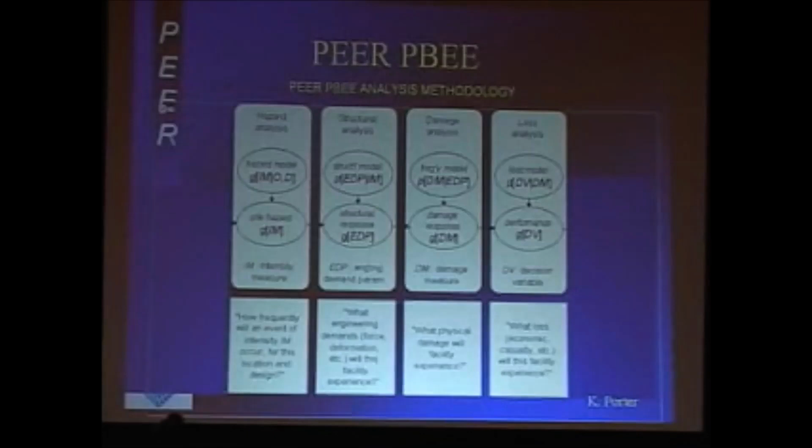This framework is made up of several pieces. Four basic sets of variables. At the beginning is something we call an intensity measure. It's useful to think of that as peak ground acceleration or spectral acceleration. But it's a measure of the intensity of shaking. And that's characterized by some function that's the annual likelihood of exceeding that intensity.

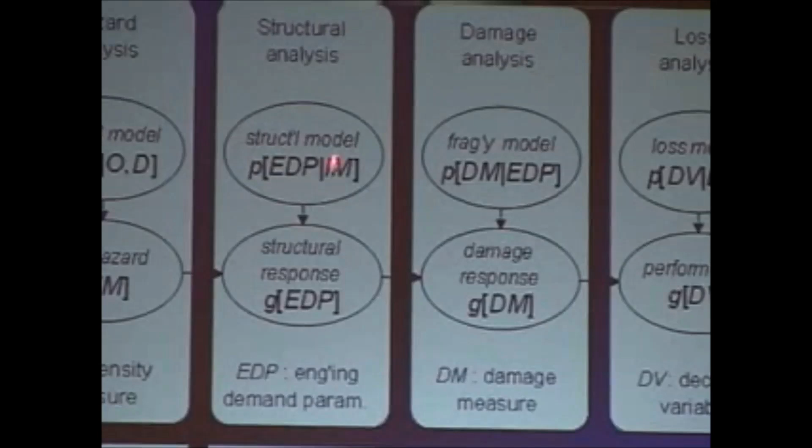A second set of variables that we call engineering demand parameters. Traditionally, those might be something like the maximum interstory drift in a frame. From a probabilistic point of view, we're interested in characterizing the conditional probability of seeing some level of, say, drift in the structure, given the intensity of the earthquake. And we can put those together, as you know, to get the annual likelihood of displacement, for example.

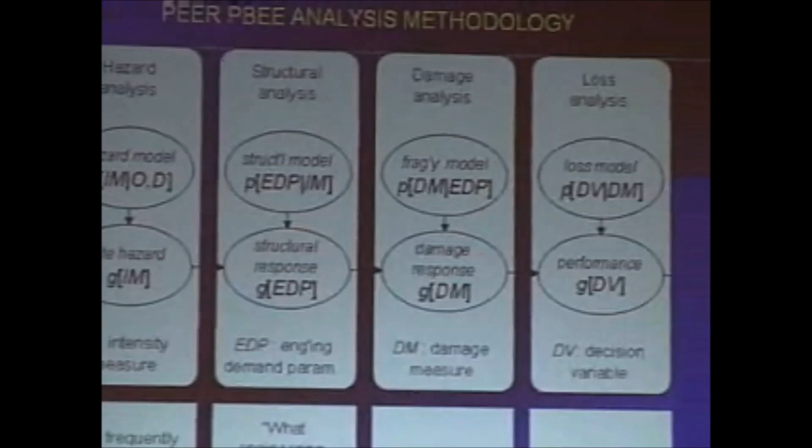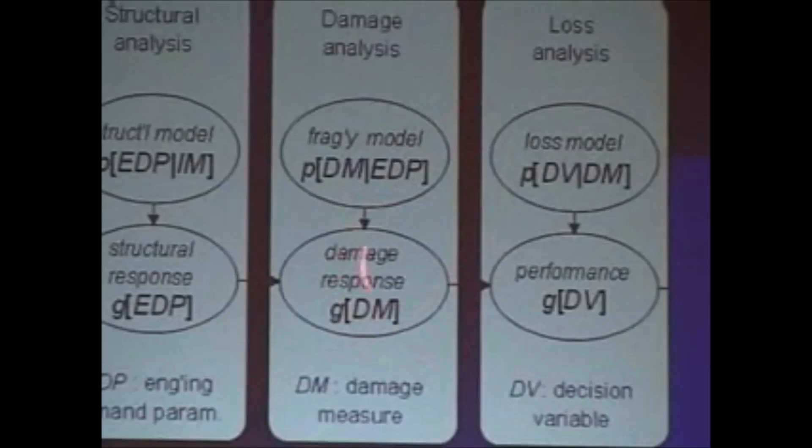In the other parts of the program, people are also interested in trying to predict damage to the facility given the displacements. So that might be the degree of cracking in a partition. And from the degrees of damage, the next step is to try to predict what we call decision variables. And that might be the repair cost for those particular partitions, for example, given their damage state.

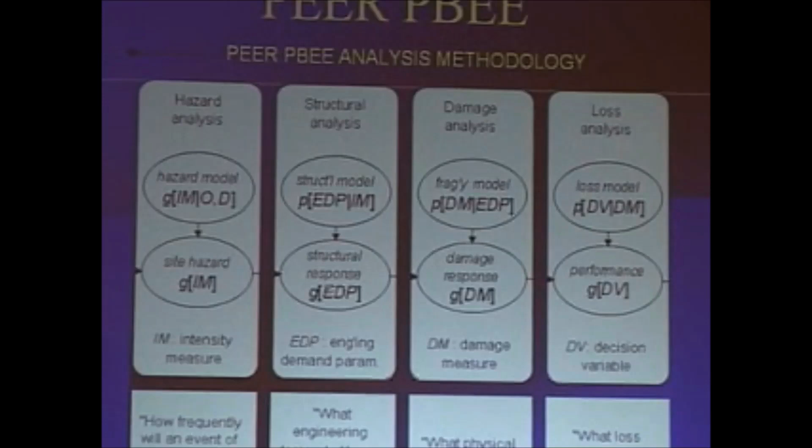So these several elements of the structure of the analysis problem associated with performance-based design are put together in a triple integral, which is called the framework equation. And as probabilists, you'll recognize this as something like this mean annual frequency of exceeding a particular ground motion level, a conditional distribution of displacement given ground motion, a conditional distribution of damage given displacement, and a conditional distribution of, for example, dollars given damage.

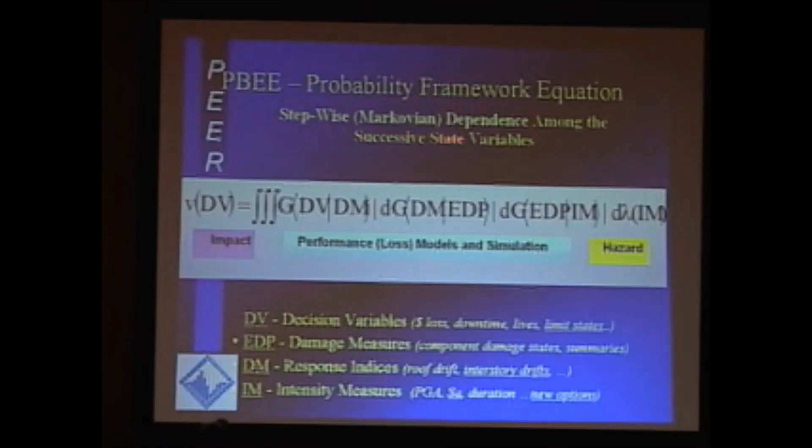So ultimately, we're interested in these so-called decision variables, which might be dollar loss, lives, limit state exceedances or not. So for example, this might be something like the mean rate of collapse events. One element of this formulation from a probabilistic point of view is that we use a Markovian type of dependence. For example, this is a conditional distribution of displacement given intensity measure. This is damage given displacement. You notice it's no longer conditional upon intensity measure.

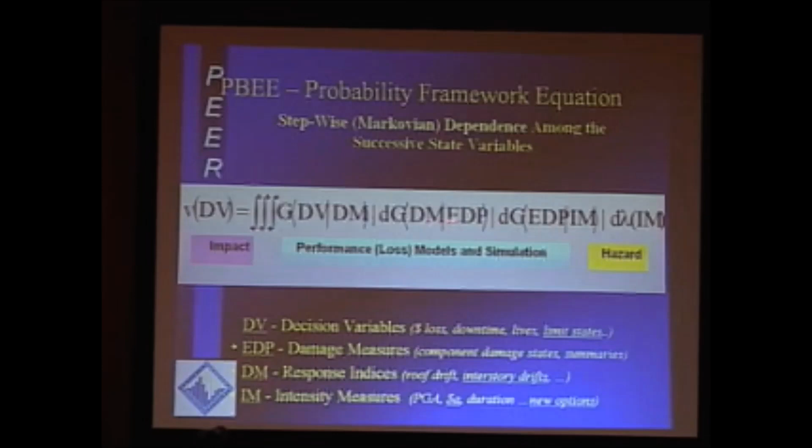So a simplifying assumption of this Markovian type dependence is used so that the focus of the individual groups in the projects can be to look at damage given displacements without having to worry about what was the intensity or nature of the ground motion which caused it. Or people worried about economic impacts of a given level of damage don't need to worry about structural displacements or intensity measures in the background. And that's a simplifying assumption that helps us enormously.

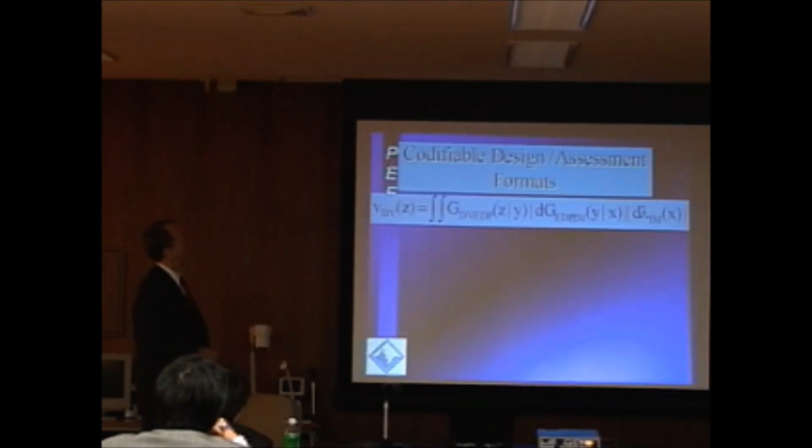One of the objectives of using this formulation is to develop probabilistic-based codes. Codes that look to the engineer user something like a load and resistance factor formulation. And that goes through a couple of steps. I'll just characterize briefly. This is a reduced integral version of the same equation, intensity to engineering demand to a decision variable. The decision variable we'd like to have a mean annual rate of would be a limit state such as collapse, no collapse. So the value z equals 1 might be the collapse condition. The value z equals 0, non-collapse.

We can simplify this to represent this in variables that are maybe more familiar to us. If we use as an intensity variable, say the spectral acceleration, the intensity of the ground motion shaking as characterized by the spectral acceleration, most frequently we would use spectral acceleration at the first mode natural period of that structure as being the spectral acceleration that best characterizes the frequency content driving the major dynamic response of

the structure. This EDP to IM relationship might more specifically be, as I suggested, say the maximum interstory drift, peak drift during time, maximized over all of the stories to get a reflection of the degree of damage in the structure, and its proximity to a collapse condition. So we need to know a conditional distribution of displacements given the strength of the ground motion. We'll get that from nonlinear time history dynamic analysis, or in more approximate schemes by, for example, static methods.

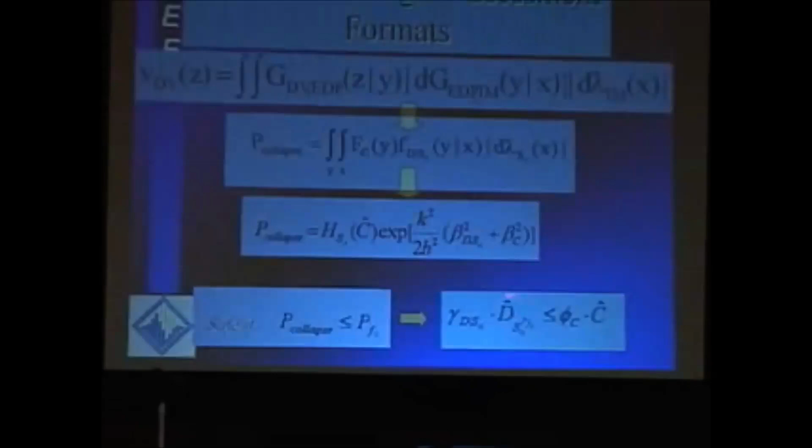But the more interesting form to get this into more viable application terms is to put this into something like a load and resistance factor format. That is, where the engineer compares a capacity, a median capacity in displacement terms, multiplied by some kind of reduction factor, like 0.9, like a phi factor. He compares it with the demand, where the demand would be a median displacement demand under a ground motion, as measured by spectral acceleration, associated with the target failure probability.

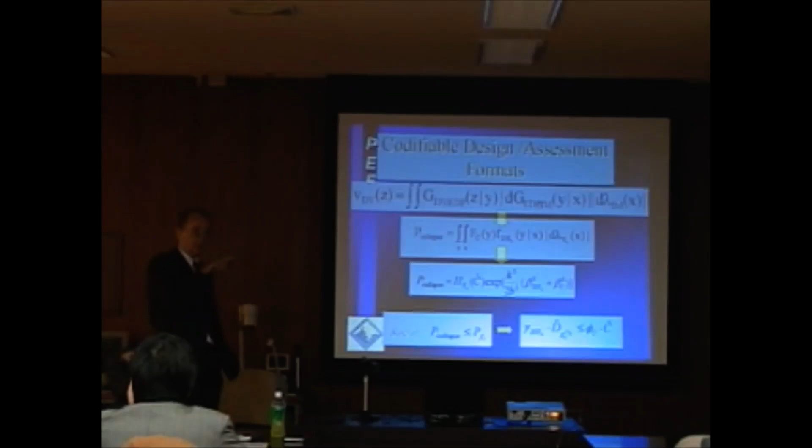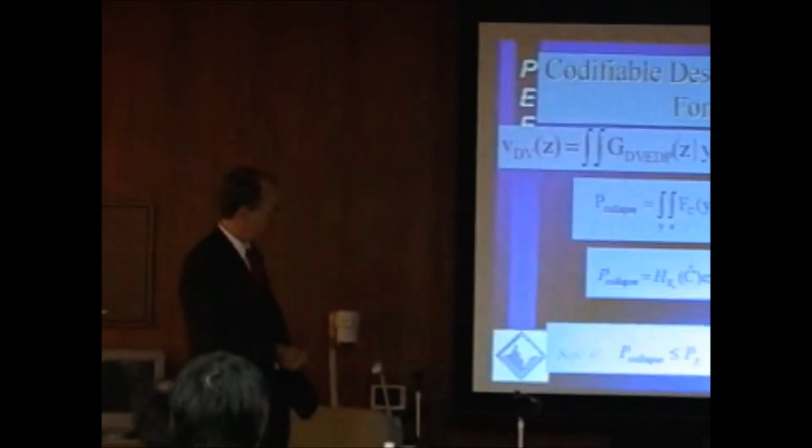So, for example, in the steel guidelines called FEMA 350 for steel moment frames, this target failure probability is set at 2% in 50 years, approximately 1 in 2,500, or 0.0004 per annum. And so we can see how that will work in just a moment. One looks at the probability, gets a corresponding ground motion level, estimates the corresponding median displacement, and then multiplies it by a gamma factor, some additional factor to reflect other

components of uncertainty. So, for example, this phi factor turns out to be an exponential form involving this dispersion, the degree of variability as measured by the standard deviation of log capacity squared. A coefficient k, which has a sense of slope on the ground motion hazard curve, and b, which we'll see a bit later, is a measure of the dependence of displacement upon ground motion intensity.

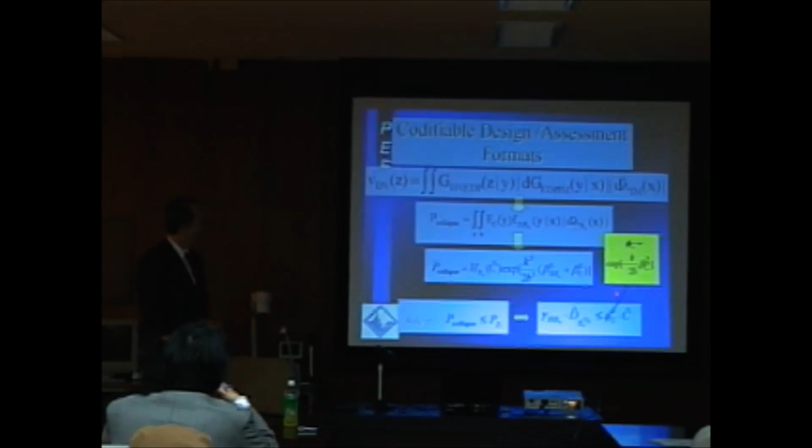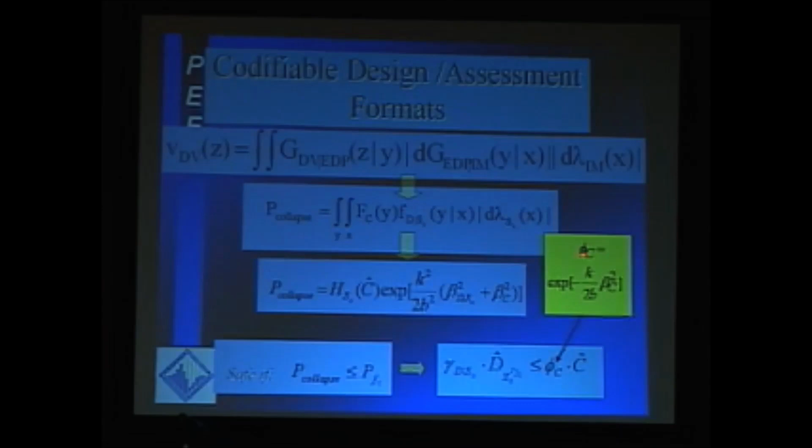The important thing to recognize here is that with some steps and some analytical assumptions, we've reduced this target limit state probability exercise to a load and resistance factor form, which makes it more familiar and more acceptable for application in practice and in codes and guidelines. But we have explicit analytical forms, so that if we make analytical studies to understand the degree of variability in capacity and in demands, we have a location in which to insert those variabilities, and we immediately get the dependence that our load and resistance factors have upon that variability.

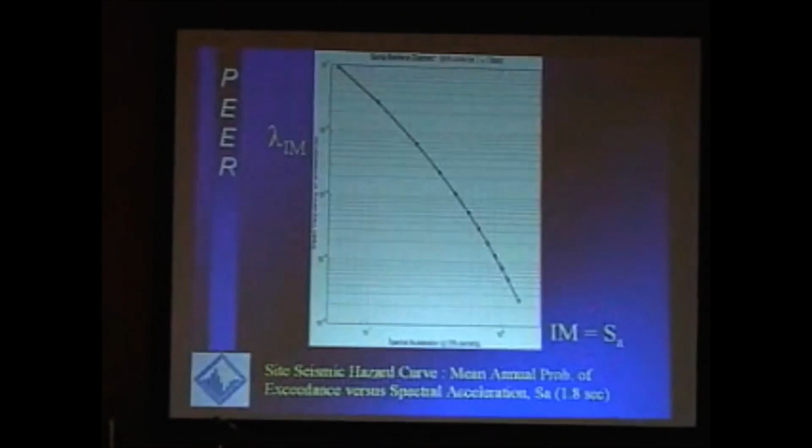So the elements of this problem then become a hazard curve. This is a result of probabilistic seismic hazard analysis. This is an annual probability of exceedance as a function of a ground motion intensity measure, here, as suggested, spectral acceleration at first mode natural period. Later in the talk, we'll talk about some alternatives for this that may work a little better.

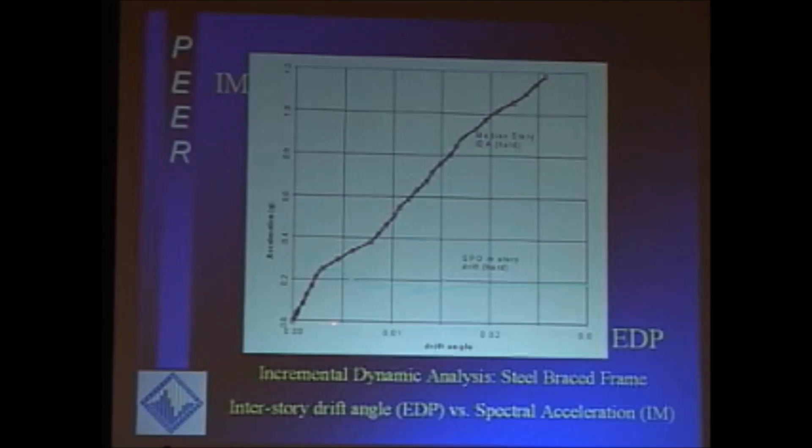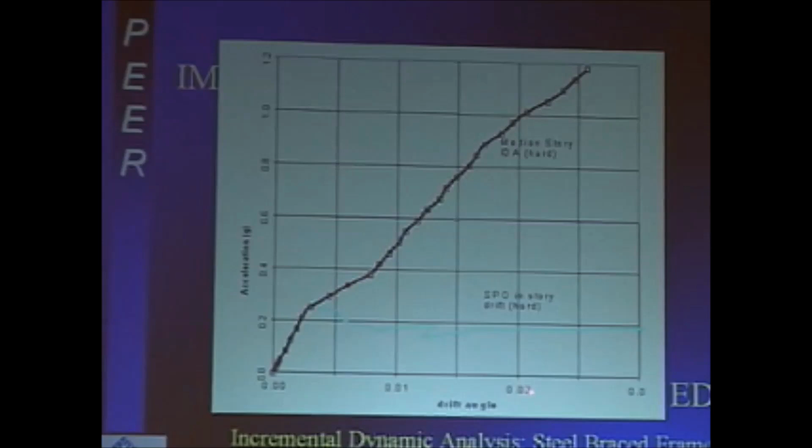What we show here is an example of what's called an incremental dynamic analysis. That is, a particular ground motion record was taken and scaled to multiple different levels. And for each level, a nonlinear dynamic analysis was run, and the maximum roof drift, or story drift in this case, was plotted. So this is a result of some 20 or 25 nonlinear dynamic analyses that shows how the drift increases as the ground motion intensity increases.

In blue, which you probably can't see, I apologize, is a conventional static pushover corresponding to this braced frame. You see it goes up, there's a yield plateau, this falls when braces buckle, and levels off at a plateau of 70 or 80%. One of the interesting things that comes out of these kinds of studies is, one, this sort of represents a dynamic version of this static pushover, but we're interested in how this increases, obviously linearly in the early phases when the structure is linear.

It tends to go to a softer slope when the structure is in the decaying strength condition. And then as this becomes a plateau, it's basically an elastoplastic system by this time, we did get sort of a straight line, something like a reduced stiffness, equal displacement rule taking place.

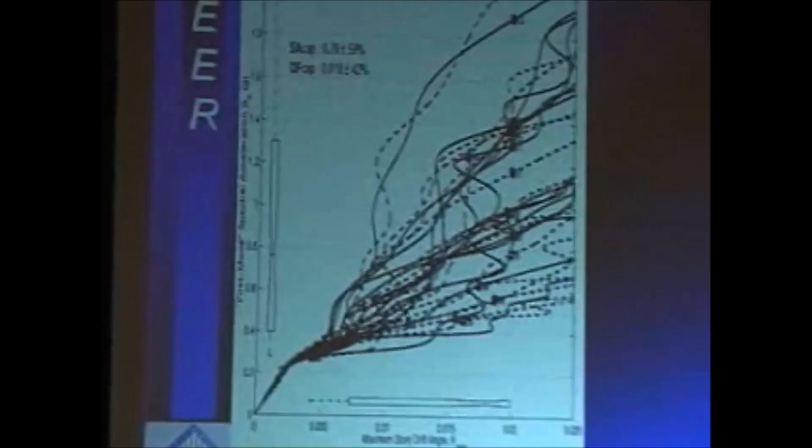This is a result of doing the same thing for that structure with multiple, some 30 ground motions. And one of the immediate things that comes out of this observation is the need for statistics. So if your structural engineering friends say we don't need probability and statistics in doing structural analysis for earthquakes, if you show them a plot like this, you can ask them, how are you going to deal with the problem that shows this degree of variability from one record to the next?

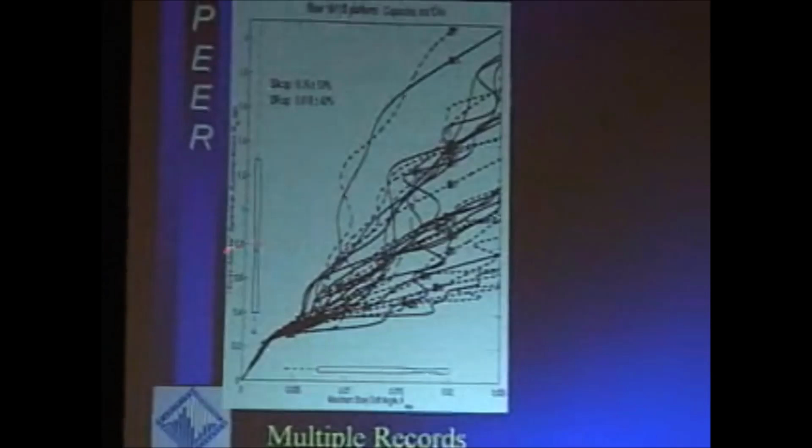And so what we have here is, again, the level of ground motion as measured by the spectral acceleration in first mode versus maximum story drift. So at any given level, you have degrees of displacement response that vary by a factor of 10 to 20, depending on which record was used. This is, again, why questions of record selection are non-trivial and important to our problem.

The nature of these curves, which we call IDAs, or incremental dynamic analyses, is also, I think, interesting. Among other things, we see them all go up, obviously following a fairly constant pattern when we're in the linear range. Also, the softer slope as the structure begins to go into a force degradation range, followed by different levels of severity of the record in terms of how rapidly the displacement increases as the ground motion increases.

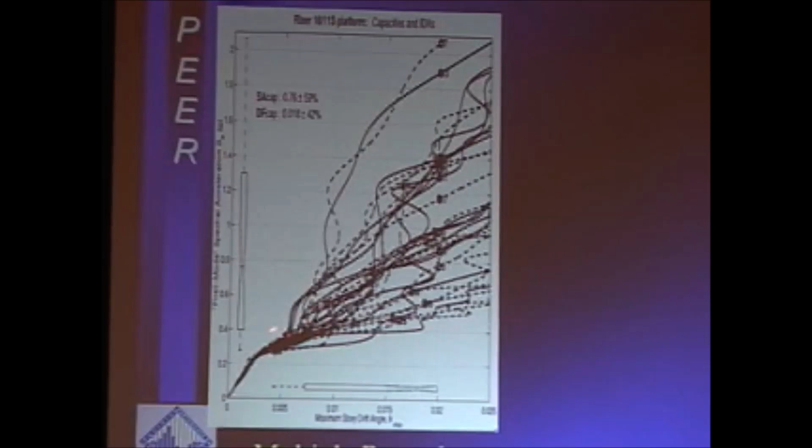We have those that are very flat, which implies a very severe record. Small changes in ground motion lead to very large changes in displacement. And some records which are quite benign. That is, if you follow this line up, you can see that even at spectral accelerations that are 5, 6, 8 times the yield spectral acceleration, the displacement versus input is effectively in the same straight line as one would have if the structure had remained linear. But mostly we see, of course, large increases in displacement.

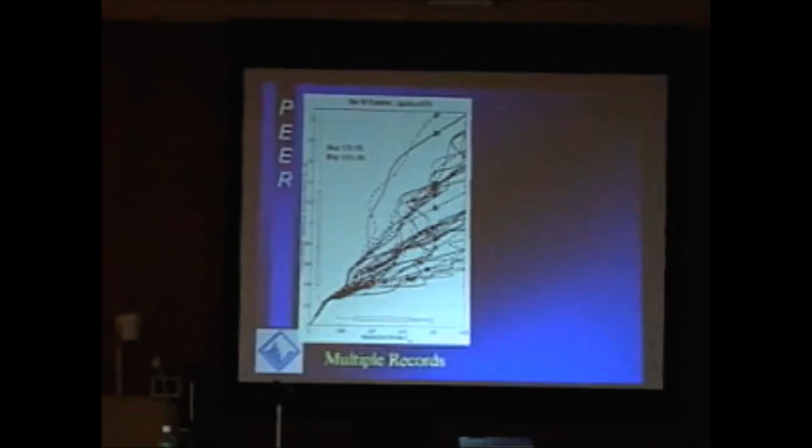And this has led to a definition of a global instability by looking at the slope of this curve. When this curve becomes virtually flat, it implies, just as with a static instability definition, a small increase in load leads to a very large increase in displacement, something like a definition of instability. But here it's a dynamic measure of the load, the dynamic responses we're looking at. Recall each of these lines is the result of 10 or 20 or 30 nonlinear dynamic analyses, something we can afford to do in the university, if not in practice.

The other characteristics of these, so in any case, we look at capacity measures often, as was done in the FEMA 350 or SAC project for steel frames, by looking at the comparative slope here versus the initial slope here. And in fact, using a rule such as 20%, that is, if this slope has become only 20% of the initial slope, defining that as an effective instability.

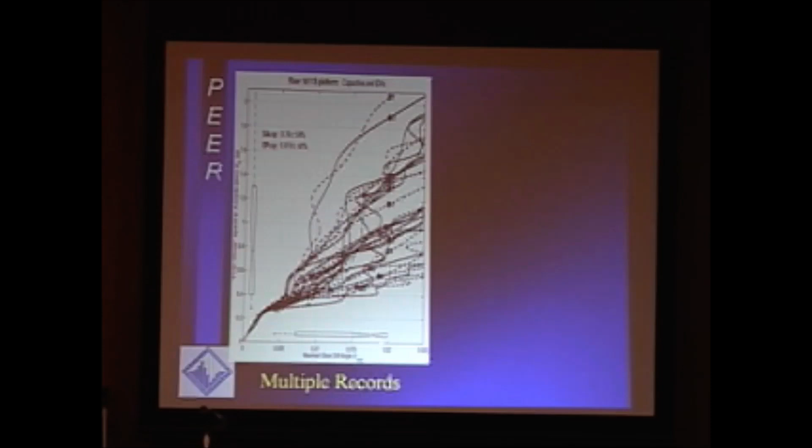And where that curve happens, these dots on here, where that 20% rule is reached, is an indication of a capacity point. That is where instability, in effect, has happened. So we can measure the displacement capacity by looking at these data points. And this is a measure of the median and the sigma and the dispersion.

Another observation to be made about these curves is they're not necessarily monotonic. That is, you can have cases where as you increase the ground motion, the displacements decrease. I'm sure you've seen that yourselves if you've run nonlinear analysis.

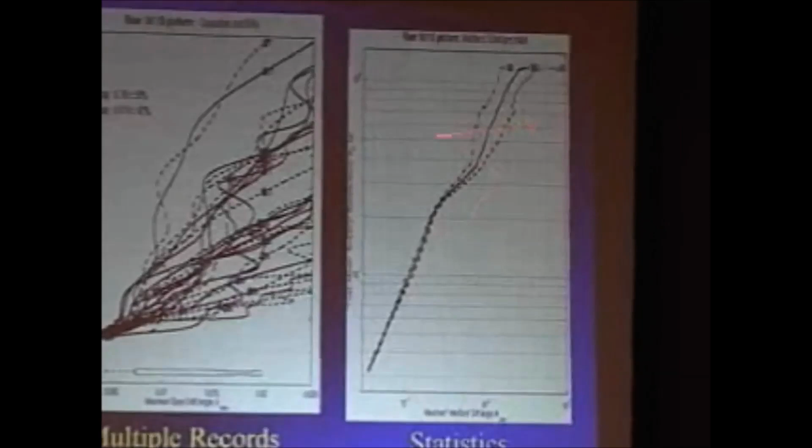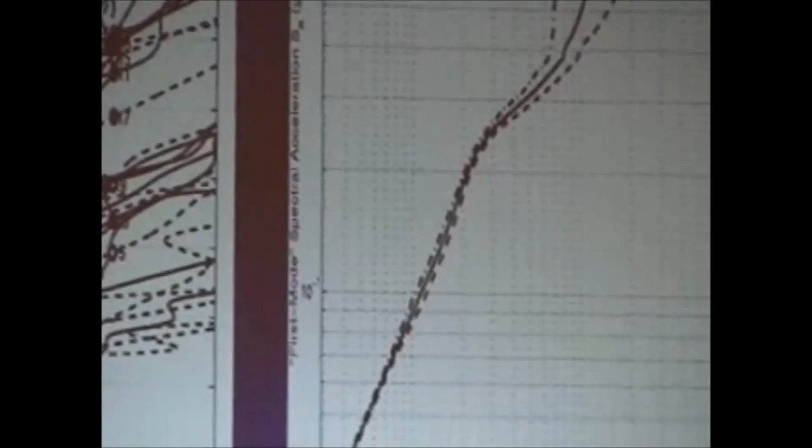So we need statistics. This on log plot is a plot of the median and the plus minus 40 percentile. I think perhaps it's a 90 and a 10 percentile value of the displacement corresponding to a particular ground motion level. And this is the dispersion we're seeing across this level. So from a curve like this, we get a median displacement given the ground motion intensity and the information needed to develop a probability distribution for the displacement given ground motion.

So these are the elements of the problem as we see them. This is a drift axis, this is a probability axis, this is a ground motion intensity axis, say spectral acceleration. So we have denoted here this so-called hazard curve, or ground motion hazard curve, which gives us the probability of exceeding a given level of ground motion. So as I suggested, those criteria in the load and resistance factor format would suggest that you enter this curve with a target failure probability, say 1 in 1,000, 1 in 10,000.

Go up until you get the corresponding spectral acceleration, which we call spectral acceleration associated with level P0 probability. Move across until you meet that median curve of displacement as a function of spectral acceleration. Drop down, it gives you a median demand, displacement demand, associated with this probability level.

There's a dispersion, as we saw across those curves, in the displacement associated with this ground motion level. And then there's a capacity curve, which is a displacement capacity as measured, for example, for the global instability capacity as we saw it. And reliability is, of course, associated with some combination by the convolution that we saw of this curve and these two curves.

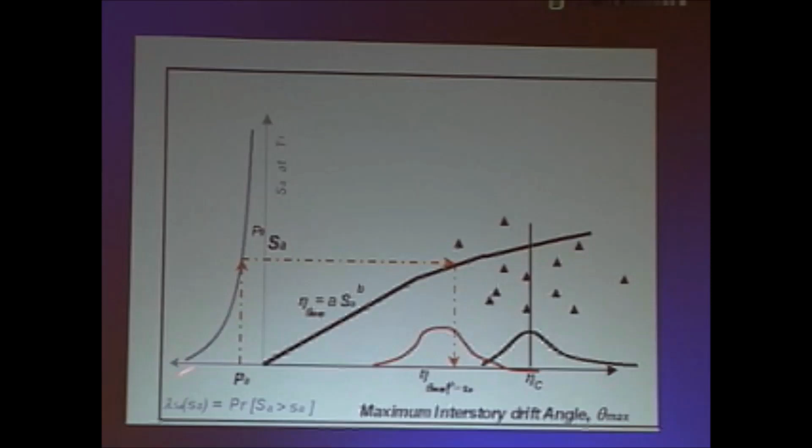This kind of thinking has been put into a set of published guidelines for assessment, post-earthquake assessment and new design of steel moment-resisting frames, a large project called the SAC project, sponsored by the Federal Emergency Management Agency. These guidelines are all available on websites for FEMA and will be discussed in tomorrow's meeting. They have been discussed in a variety of articles in the Journal of Structural Engineering, and there's a new special issue of Earthquake Spectra appearing later this year, another collection of articles on the subject.

The key characteristics of these guidelines from our perspective are that they're completely probabilistic. They start from probability and work up, so the foundation is entirely probabilistic. They're completely dynamic as opposed to static in nature. They are completely nonlinear as opposed to linear in their basis. They involve checking for this global instability that we discussed a moment ago, and also local collapse modes, such as loss of vertical shear capacity in the connections. They are displacement-based rather than force-based.

And, again from a probabilistic context, they separate two types of uncertainty that we refer to with complicated words. Aleatory, which is a Latin word meaning a die, something that one flips. So this is a representation of pure randomness, like the nature of these earthquake records. And the second type of uncertainty, a Greek word, epistemic, which has to do with knowledge. So this is the type of uncertainty associated with limited knowledge, for example, the fact that we don't know perfectly how our models work and how to model buildings in severe nonlinear behavior.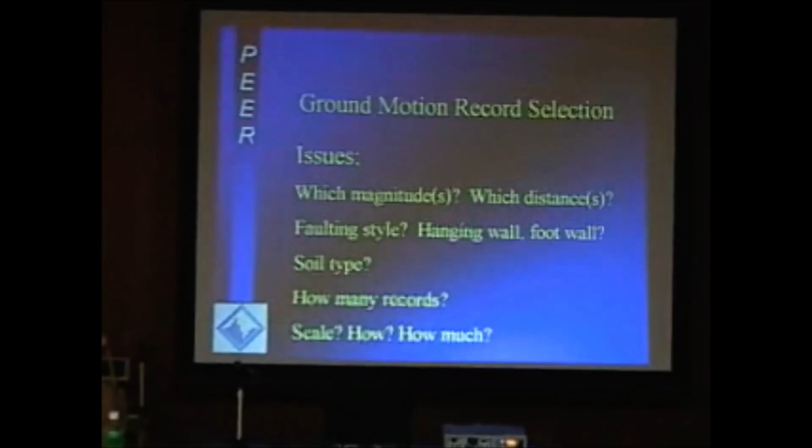Okay, how does all of this fit? We've seen that these ground motion records play an important role in working with nonlinear time history dynamic analysis. But a continuing question that comes back is, which records should I use? Should it be El Centro 1940 or some other record? Or which records? How many records? What do I do with them when I've got them?

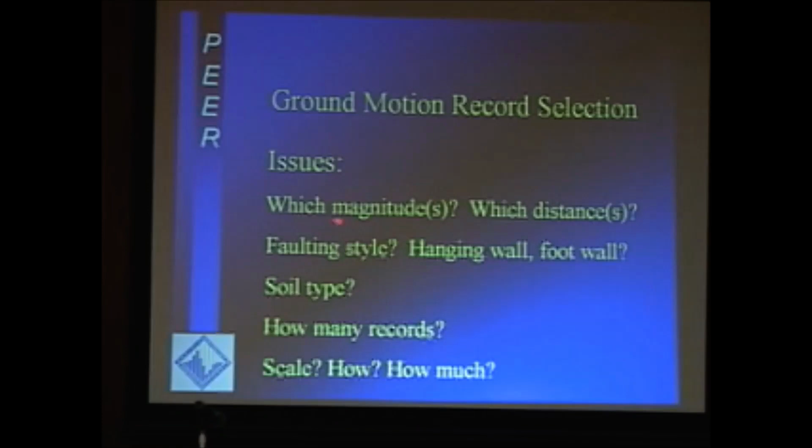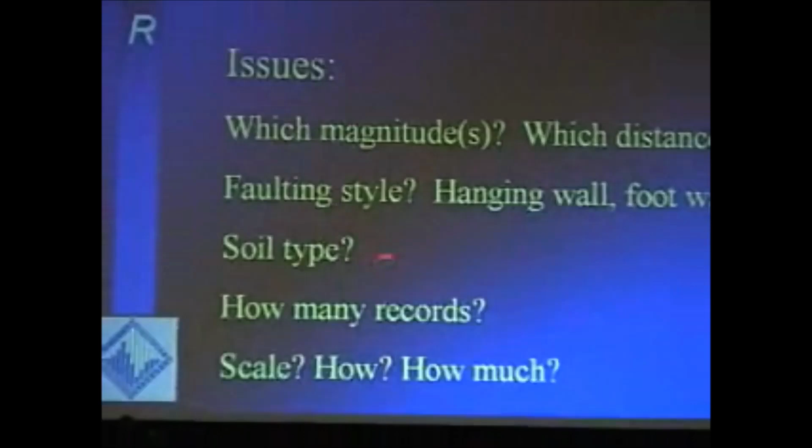Do I need to reflect, for example, the important magnitudes at my site, the important distances between the site and important faults? Is the style of faulting, strike slip versus normal, important? Some people worry on normal faults about whether the records are taken on the hanging wall or the footwall of the fault. The soil type, everybody agrees, is important, but these other issues of what should be done with these records remain a wide open question for which there's continued discussion.

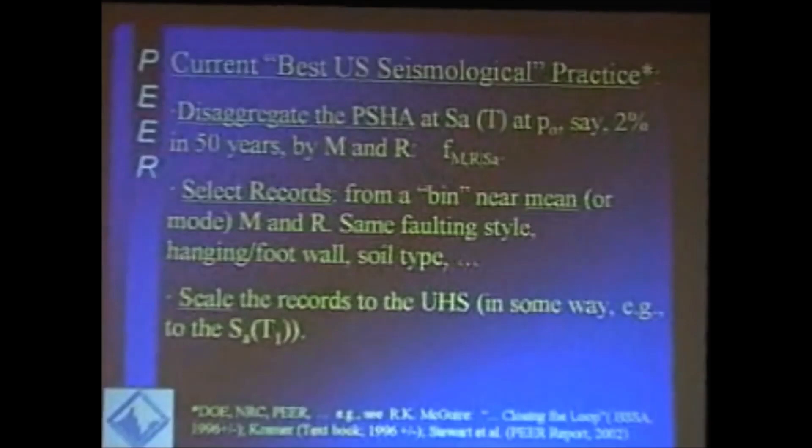The best practice in the United States today, as conducted by engineering seismologists charged with providing these records to the engineers, are the following steps. They do a probabilistic seismic hazard analysis to get one of the curves of the type we saw at the spectral acceleration associated with a period close to the fundamental mode period. They look at a particular probability level, as we saw, for example, 2% in 50 years, or 1 in 2,500. And they disaggregate that, which is a procedure I'm not going to have time to discuss with you.

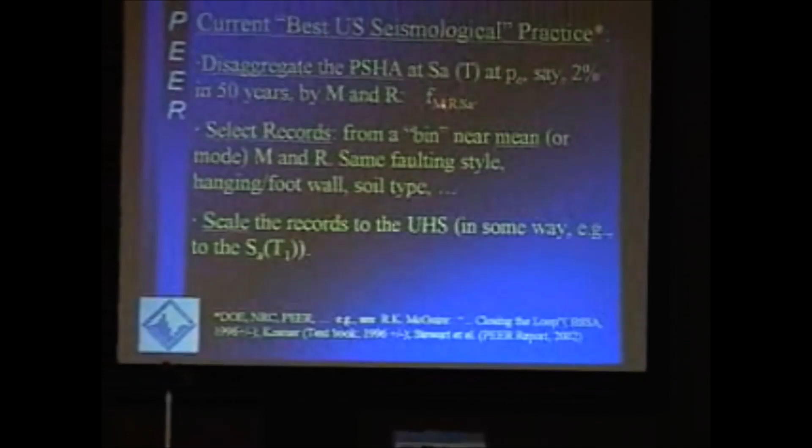Basically, it gives you the conditional distribution of the magnitude and distance of the event that caused this level of spectral acceleration. So if this 2% in 50 years at your site is 1G, you would say, given 1G, what was the likely causative event? It's found by a simple Bayes theorem kind of computation. So it's an inversion of the input to the hazard analysis to get out what caused the event.

This probability distribution is then inspected to say what is the most likely magnitude, or what is the expected magnitude, the mean magnitude, to have been the cause of this severe ground motion. And what is the most likely distance, or mean expected distance. And that is used to select the set of magnitudes and distances of the records that will be given to the engineer. Typically a mode or mean of that joint distribution is used, mean magnitude and mean distance, or modal magnitude and modal distance.

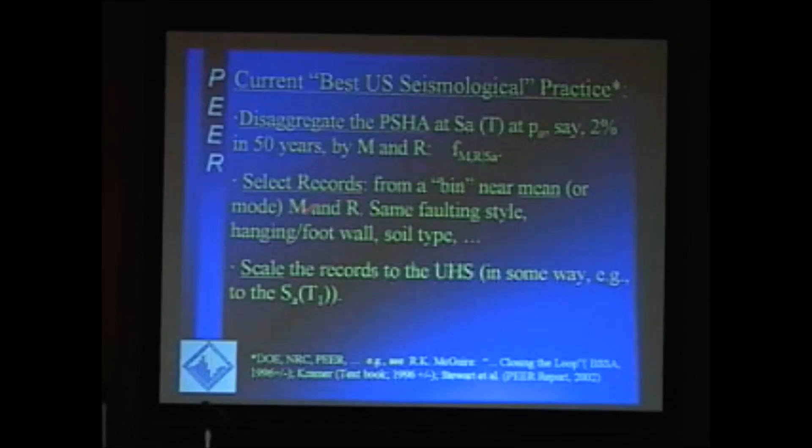Then the seismologist tries very hard to find the same faulting style, strike slip, for example, to worry about the soil type, to worry about whether it's hanging wall, foot wall, and to then collect from the catalog of thousands of records available some set of such records that meet these conditions. Say within plus or minus 0.25 magnitude units of the most likely magnitude.

Then these records are scaled in some way; the typical way would be such that the spectral acceleration that they have coincides with this number chosen up here, say 1G. So the records are scaled back to match that 1G level. This is common practice in our Nuclear Regulatory Commission exercises, the PEER project itself, a variety of procedures and recommendations that are common practice today.

A number of questions can be asked about this procedure. Why do we disaggregate spectral acceleration? Maybe we should try to disaggregate the drift, if it's actually the drift of the structure we're interested in. That would require some kind of iterative procedure, but might be very useful. Some suggest that we work with epsilon. Let me not follow that. Why do we use the mean instead of the mode, or the mode instead of the mean?

The better idea, instead of picking out one magnitude, would be to pick out a set of magnitudes so that you, for example, represent that frequency distribution of magnitude. Some magnitudes a little bigger than the mean, some magnitudes a little less than the mean, but in the right relative proportions that this disaggregation tells you is important to your site.

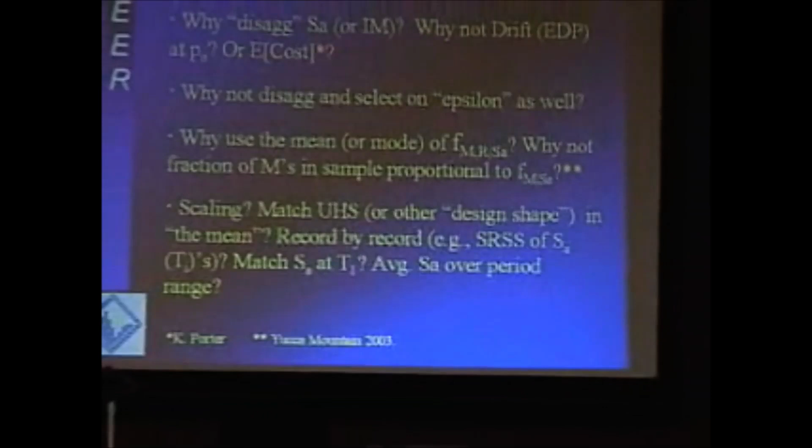There are many ways scaling might be done. Many people will try to match the records either individually or in an ensemble way to the design response spectrum. Now, design response spectrum might be what we call the uniform hazard spectrum that's come out of the probabilistic seismic hazard analysis. It might be a code shape, UBC, IBC, one of the design code shapes. Well, as I said, that match may be on average, it may be on a record-by-record basis, trying to match the spectrum in a broad sense, or it may be more locally, as I suggested before.

The narrowest way to do that is simply to scale each record so that its spectral acceleration at the first mode period of the structure matches this target value, or that target probability. This implies that you must know something about the structure before you scale the records. It also implies you need to know the level of ground motion you're interested in before you scale the record. If some performance-based codes today have one probability level for collapse considerations, another probability level for immediate occupancy or economic damage, that means you would have to have different scaling of the records for these different conditions.

Okay, so this process, at least that's used popularly in the US, in those cases when we do nonlinear time history analysis, is, as I suggested, a very careful selection process that is carefully trying to match the records to the site, and to a limited degree match them to the structure by perhaps scaling the records to that first mode period level. And presumably the reason it's done is because we think it matters.

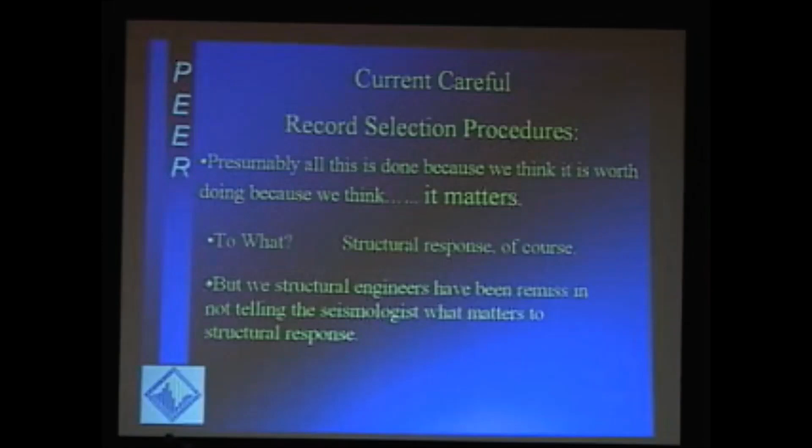And it matters to what? Well, it matters to the structural response, because we're using these records to, of course, obtain structural response predictions. But as structural engineers, at least in my country, we've done almost nothing to communicate to the seismologist what matters to structural response. So the seismologist is collecting these records without the professional knowledge of what matters to structural engineers. So the seismologists have been very prudent.

They assume everything matters. They assume the magnitude matters, so they make sure the magnitude matches what is the critical magnitude of the site. They assume the distance matters, so they match the distance of the record to the distance of the site to the critical fault, etc. They assume the style of faulting matters. So they've been very careful and very prudent about that, but without much consideration about response.

So I'd like to begin to explore the problem from the structural response perspective, to look more carefully at this question of what matters in terms of how best to select records. And so I start with a null hypothesis that says nothing matters. It doesn't matter which magnitude you choose this record from, or which distance or style of faulting. Now, why does that position maybe make sense as a starting point?

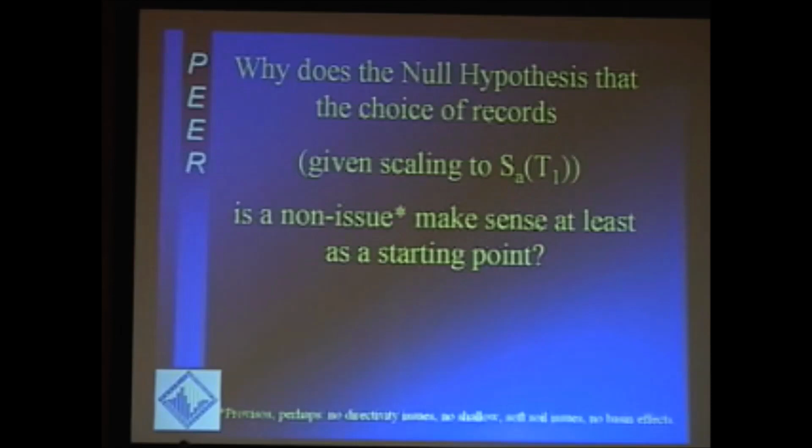Well, I'm going to assume that we're scaling the records to our target level of spectral acceleration at the first mode period. That's a method of scaling I prefer. It's quite commonly used. So we're actually going to scale the records to match them at this spectral acceleration. Well, why does this become a non-issue if we do this?

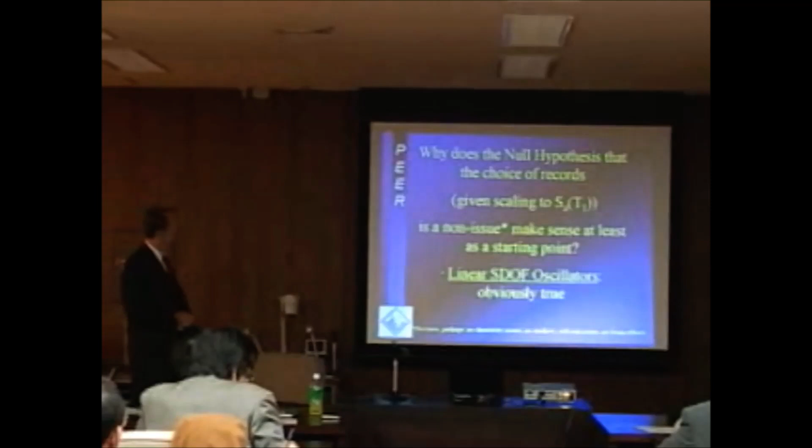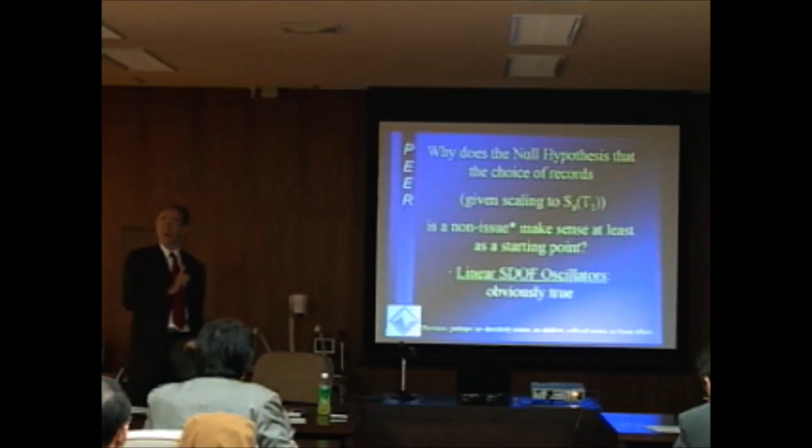Well, let's assume our structure is not really a structure, but just a linear oscillator. Clearly, if I scale all the records to the first mode spectral acceleration of the linear oscillator, and then run the records through the oscillator, they're all going to give me back exactly the same spectral acceleration. Every record will do exactly the same thing. So as an initial starting point, it makes some sense to me that if I scale the records this way, the results should be independent of the record. That's rather obvious to the structural engineer, maybe not to the seismologist, but it is to us.

And many of our structures, in some degree or another, act pretty much like a 1 degree of freedom system, and perhaps elastically in the small damage regime. What about linear multi-degree of freedom systems? Well, if we assume an SRSS kind of rule, in 2 modes, we can separate the estimated response into a participation factor in a first mode, and then a set of factors that represent second mode impact, that is the ratio of participation factors, and a ratio of spectral accelerations at second mode to first mode. That would be sort of our SRSS prediction.

But of course, even if we scale to the first mode spectral acceleration, the different records are going to give us different ratios of this second mode to first mode spectral acceleration. So the variability we're going to see record to record, if this is the way the structure behaves, is going to be from this spectral shape issue. And so the question is, how important is this second term?

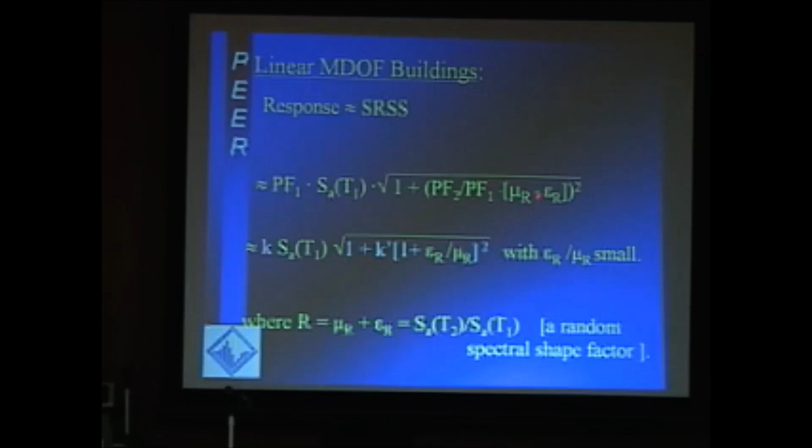There's some constants that run around in here, but the net effect is, how big is the deviation of the spectral shape away from the average spectral shape? That's what's going to show up in the only really remaining random term, or record-to-record variability. I contend that term is usually fairly small, and so the anticipation that there will not be too much variation from record to record in multi-degree of freedom linear systems is perhaps to be anticipated.

Again, supporting this notion that perhaps our results will not be too sensitive to the record selection as long as we do the scaling this way. Well, what about nonlinear systems? Well, we're going to look directly, by making some comparisons in a moment, at nonlinear systems, both oscillators and some multi-degree of freedom systems. And we'll look at them again directly, and you'll see in a moment what I mean by directly. We'll compare response from different record sets, just to see if it matters.

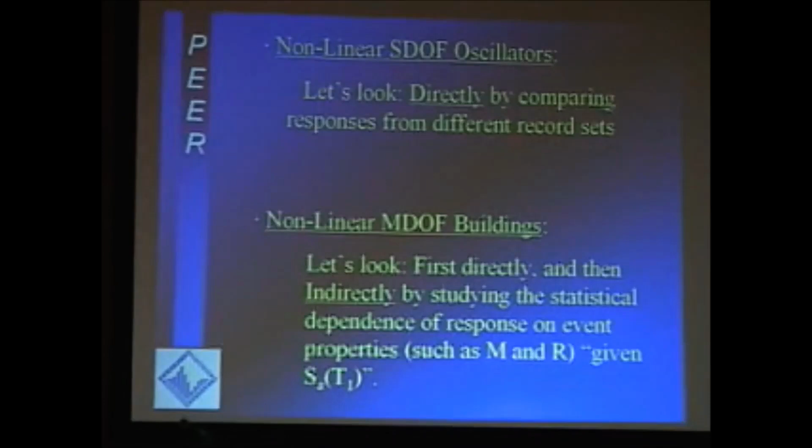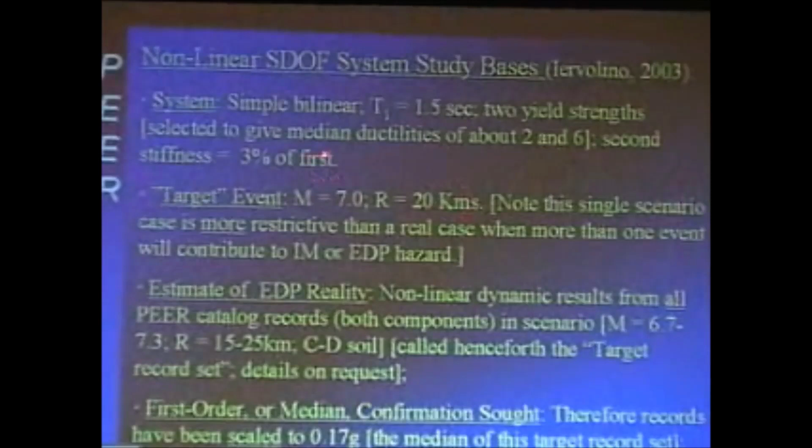Here's a very busy slide that just explains this little test we're going to do for nonlinear, this direct way of looking at nonlinear oscillators. We'll take a very simple system, 1.5 second period, bilinear. We're going to adjust the strength of the system so that it gives ductilities first of about 2, and then later we'll adjust it so it gives ductilities of about 6. We're going to say that the site of this structure is dominated by magnitude 7s at 20 kilometers. We have one fault at the same distance that only produces one kind of magnitude.

And we're going to then estimate what the response is of the displacement by taking a suite of records from exactly that magnitude and distance. So we do as well as a seismologist can by looking at a narrow magnitude bin and a narrow distance bin, common soil type, and that will be called what we call the target record set. So that's precisely matching the conditions that nature is throwing at us. And then we're going to look at some other record sets to see if it matters.

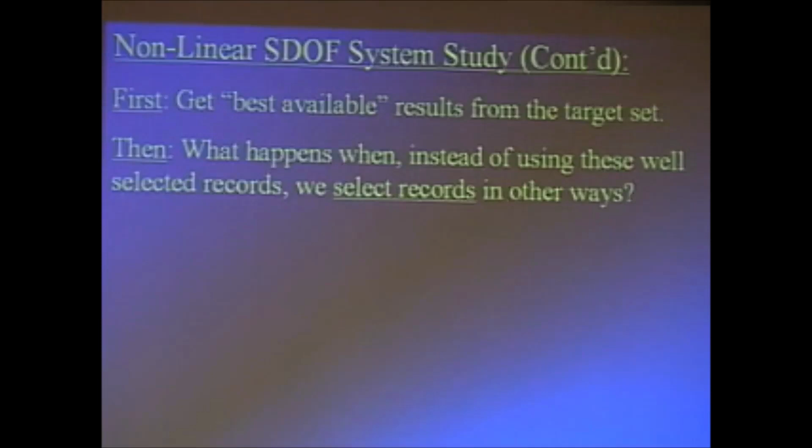And the comparison we're going to make is to take the records, for example, this target set, scale them to the median of that target set, median spectral acceleration, which happens to be 0.17 g. That scaling isn't necessary here, but it reduces dispersion and makes our significance tests stronger. So first we're going to get the best available results from our target set, and then we're going to see what happens when we use the wrong set of records. Okay? We'll choose the records some other way to see if it matters compared to the right set of records. So what are the wrong sets of records we're going to use?

Well, unless you believe that magnitude and distance and other properties of the record are important, under my null hypothesis that they are not important. The best way to select records would be to go to the catalog of records and choose them at random. That's what a statistician would tell you to do. Choose the records at random so you don't throw any bias into the problem by taking records that look smooth or records that just give you low response in some modes of your building because you like the building to look like it behaves well.

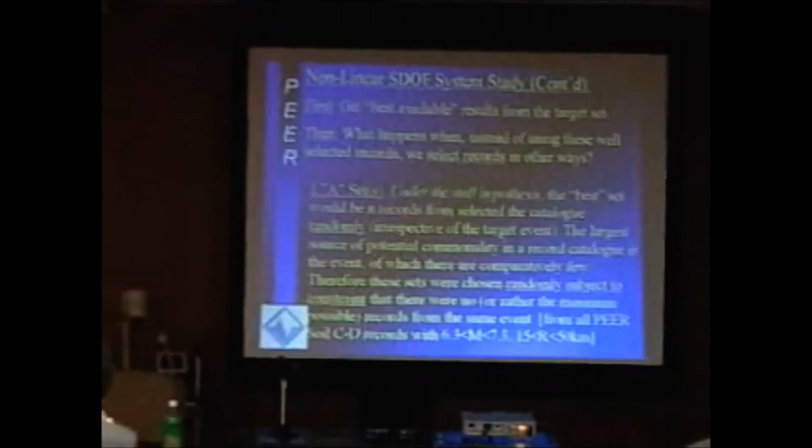Well, the only condition is, when you go to the catalog, we have lots of records, but comparatively few events causing those things. So we suggested that we choose the records at random, but subject to the constraint that we avoid repeating events if possible. So if I'm going to choose a set of 10 records, I don't want 9 records from Loma Prieta and 1 from El Centro. I would like to have 1 from Loma Prieta, 1 from El Centro, and 1 from Taft. I'd like to have different events in that process to avoid potential within-event correlation. So we're going to choose some effectively random sets.

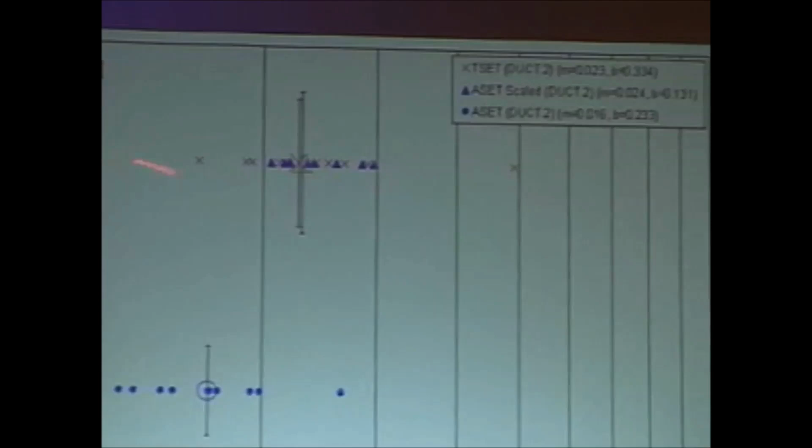And here's the results for the sort of low ductility level. The X's here are the results of running this set of records that are very close to magnitude 7 and very close to 20 kilometers. These are some of the 10 records. Notice they're all scaled at spectral acceleration 0.17, as I promised. If they weren't scaled, we'd see a little cloud of results here, but the scaling reduces the dispersion.

And these are the drifts, and they measure from about 2 to 3%. Then we took one of our so-called random sets, or A sets, as we call them, arbitrary sets, of 10 records, selected at random from the computer catalog of records, and ran them at their median spectral acceleration, which was 0.11. They're clearly generally smaller magnitudes, generally larger distances, they're generally weaker records, so it's not surprising that they are not themselves as strong as this large magnitude 7 close distance set that is our target set.

So they give displacements down here about half as large, but then we took these records and simply scaled them up to 0.17, scaled them all by about a factor of 1.5. And the blue dots are the same result, same records then, scaled up, and those are the displacements that we get. And these two lines are the two medians. So clearly the median response from the real records and the median response from the wrong records scaled to the right spectral acceleration is virtually identical, well within the statistical error band.

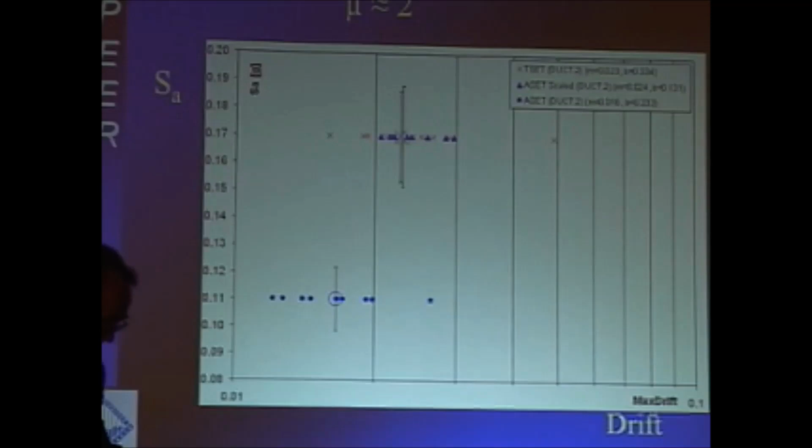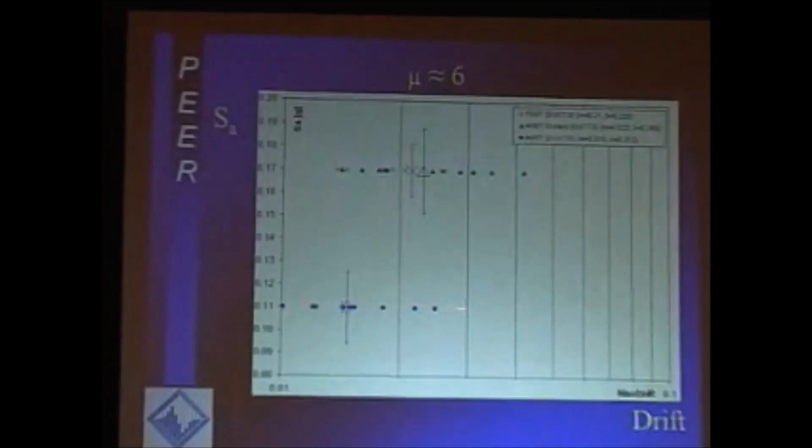Here we've done exactly the same thing. We've just decreased the yield strength of the oscillator so that it has ductilities closer to 6, more severe nonlinear behavior. Exactly the same thing. The X's are the real records, the target records, magnitude 7 close distance records. The blue records are the ones we chose before arbitrarily or randomly, and we simply scaled them up to this same spectral acceleration as the stronger records. The medians are within a few percent of each other.

I'm sorry, this slide, I couldn't figure out how to make this slide better. I will in the future.

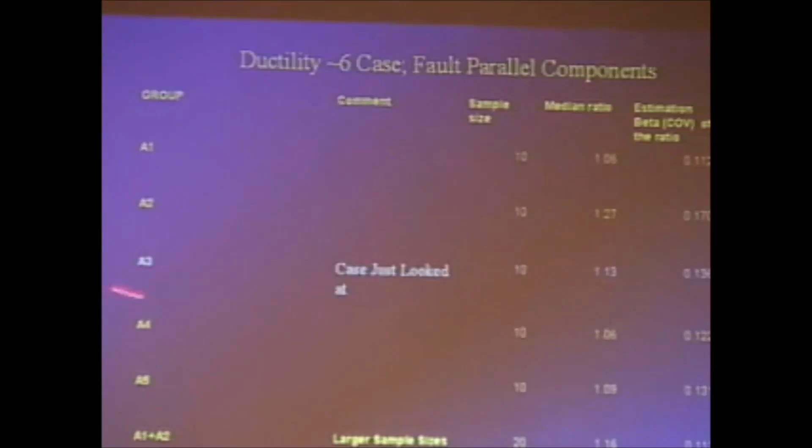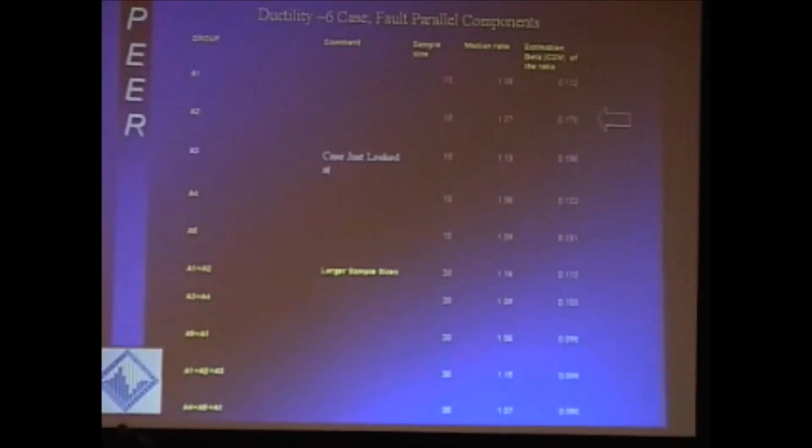What we have here are different sets, A1, 2, 3, 4, 5, of 10 randomly selected records. The case we just looked at was A3. This is the case we looked at. This is the sample size 10. Each of these first 5 groups here are sample size 10. This is the ratio of the medians, of the median response from the random set to the median response of the target set. And you can see there they run 1.06, 1.13, 1.06, 1.09. One is comparatively large, 1.27.

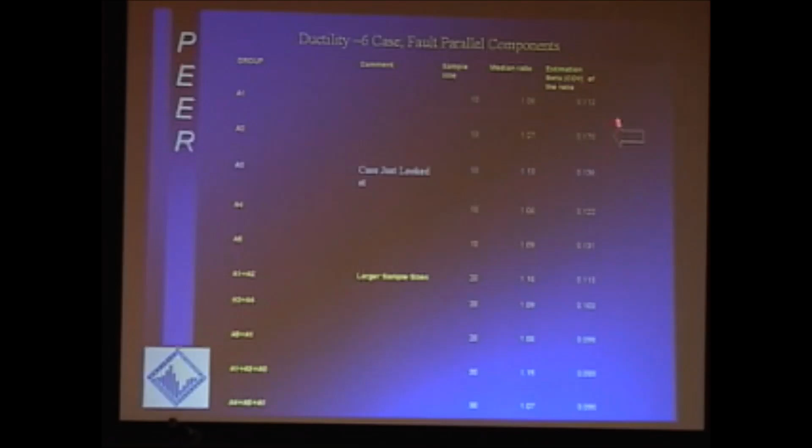Over here is a standard error of estimation of this ratio under the null hypothesis that the ratio is 1. So the case we just looked at, the ratio is 1.13 with the standard error of estimation of 0.136. Clearly, this 113 is within one standard error. We would conclude as statisticians that we can accept the null hypothesis that the ratio is 1. Or more intelligently, we could say that we get the same responses from the random sets of records as we do from the target sets of records. And that's virtually the same throughout here. The only case where this is 127 versus 17, that's a case of maybe 1.5 sigma. It's beginning to stretch the acceptance limit, perhaps, but it's only one of these cases.

If we now combine cases, say 1 and 2, 3 and 4, to make sample sizes of 20, again, the limits are very close to 1. The ratios of median response of arbitrary sets to target set. The standard errors go down because we've increased the sample size. Here's groups of 30, and so the standard errors go down, making our tests more powerful statistically, but again, the conclusions are very much the same. We can get the same answers with records of rather arbitrary magnitude and distances.

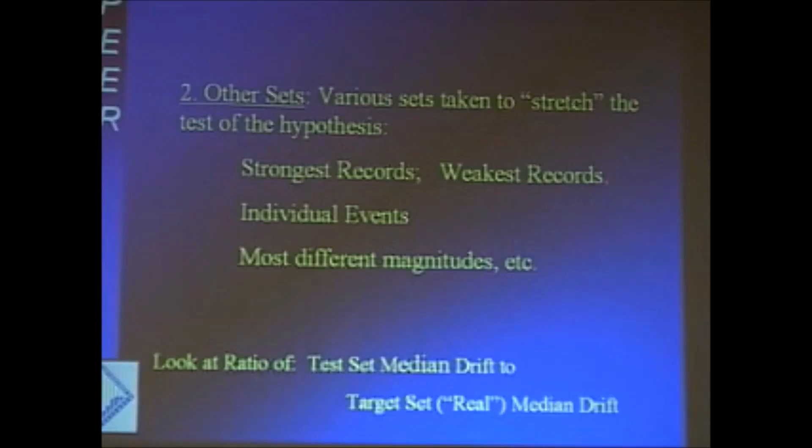Then we've taken some other sets to kind of stretch this hypothesis. For example, we've taken all the strongest records, that is, the ones with the largest recorded spectral acceleration, weakest set, to take all the records from one event, take different low magnitudes, etc. And just to look quickly at some of those, here are the weakest, maybe the highest records. One had the highest spectral accelerations. They actually gave one of the smaller ratios, somewhat less than one. All the records taken from the Loma Prieta event, 112, all from the Imperial Valley event, 129, the Northridge event, 0.88, all very close to 1.

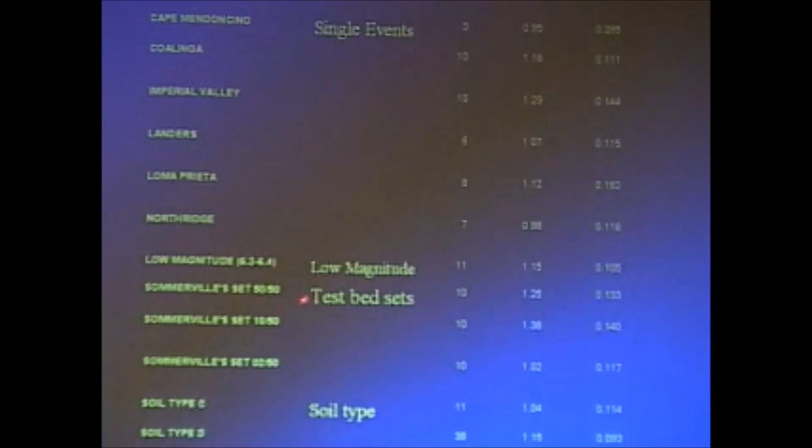Here are the lowest magnitudes. They're all around between 6.2, 6.3, 115. These happen to, well, I won't discuss these. These are the ones that our seismologist, Paul Somerville, working for the PEER project, chose for us to use when studying structures in Los Angeles. They actually give the ratios somewhat distant to 1. All the records from soil type C, 104. All from soil type D, 116. The point is this ratio is almost always 1. You can see the case that's actually 3 sigma out, here are the standard errors of estimation again, is actually when we take the records with the lowest strengths. 10 records with the lowest strength.

And a couple of these cases that Dr. Somerville showed. I'm not sure why it's supposed to be the case. So looking at this one test case, it suggests then that if we scale records this way, which is a natural way, I believe, the median displacements are apparently effectively independent of the record set used. And that's, as I said, a rather heretical conclusion to come to in the face of all the care and effort that's taken to selecting records.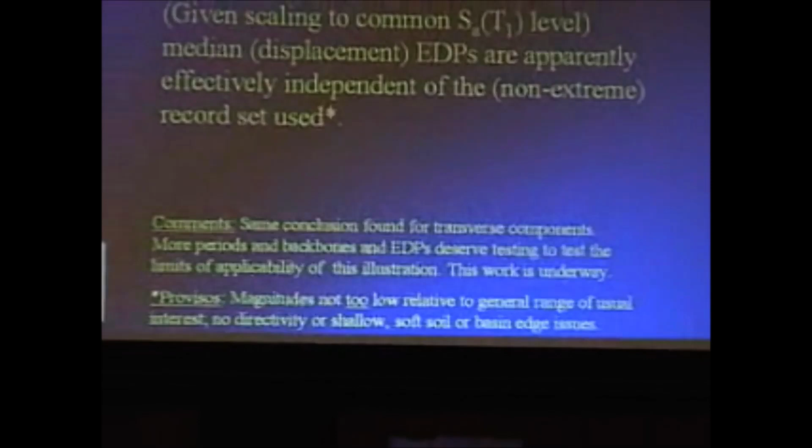There are a number of provisos here. First, we haven't looked at very many cases. This was a quick study by a student to help me prepare a lecture. He's looking at some more periods, some more backbones on the oscillators, etc. One shouldn't go too small with these magnitudes, or you will change spectral shapes significantly and perhaps make more difference. Let's say below 6 or below 5.75. We avoided all records with directivity or shallow soil, soft soil, or basin edge effects. So those are special cases that may require more care. We'll come back to the directivity issue a bit later.

We've also done the same thing with a nonlinear structure. This is a model of the Van Nuys Holiday Inn, a famous structure that's been shaken by many serious earthquakes. It's an older reinforced concrete frame structure. We took the same scenario set, and we took one of these random sets, the same one we looked at before. These are the maximum story drifts, 0.0056, 0.003. These correspond to ductilities. It's hard to measure ductility of reinforced concrete, but ductility of 2 to 3 in the worst story. Again, ratio very close to 1, well within the standard error of estimation. Okay, so those are some examples of direct comparisons.

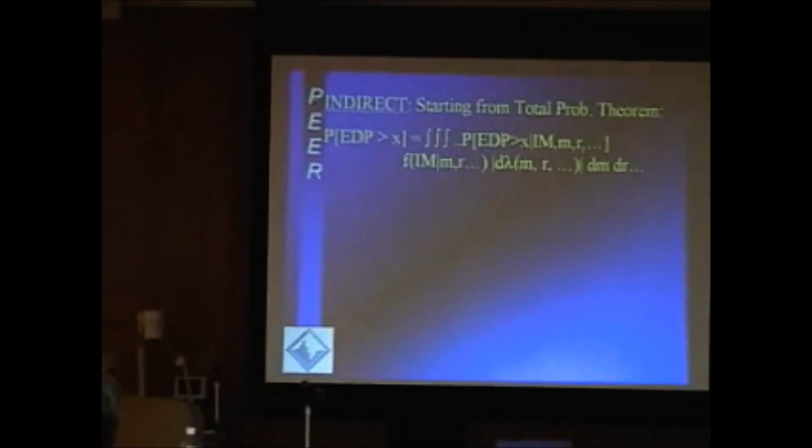We have some indirect ways to test this same question. And the question is, in statistical terms, once we know the intensity level as measured by spectral acceleration, do other properties of the record, such as its causative source, its magnitude, its distance, seem to have important effects on nonlinear structural response? Another way to look at that problem more formally as probabilists or statisticians is to say what we're trying to calculate ultimately is the annual probability that the drift, the engineering demand parameter, exceeds level X.

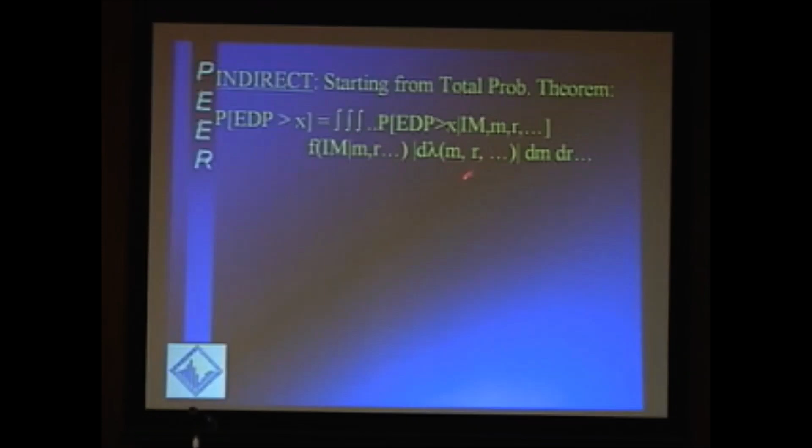We can solve that with a total probability theorem expansion by saying, let me calculate the probability it exceeds X when I know the level of the intensity measure, say spectral acceleration at the first mode. I know the magnitude, I know the distance, I know anything else, like faulting style, etc. And then I can multiply that conditional probability by the conditional probability of IM, the intensity measure, given magnitude and distance, and multiply by the likelihood of getting events with given magnitudes, given distances, etc. So this is a two-step total probability theorem expansion. What does that buy us?

Well, the question is, under what circumstances can I take this term, which says the conditional probability of exceeding drift X given the intensity measure, the magnitude, and distance, and replace it? When can I simplify that and replace this by this much simpler expression? Well, I can do that if there is what we call conditional independence. That is, this term up here, where in general, according to total probability theorem, I must maintain dependence on intensity measure, magnitude, distance, etc.

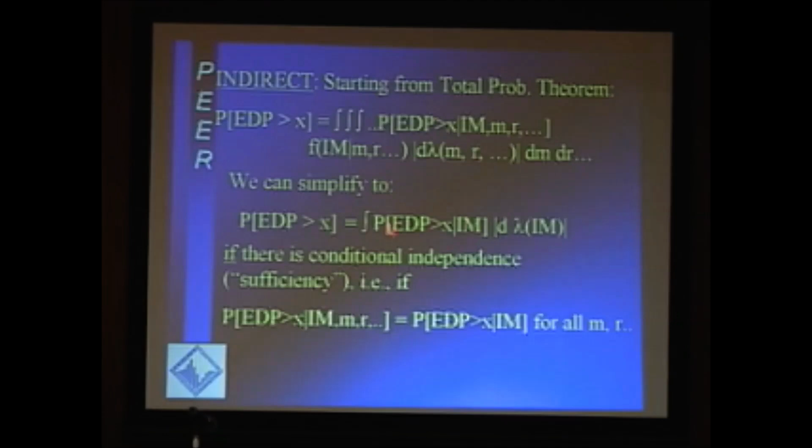If I can drop the dependence on magnitude, distance, and other properties of the record, other than its intensity, and if that equality is true, that is to say that the drift is independent of magnitude, distance, faulting style, etc., provided you give me the intensity, if that's true for all magnitudes, all distances, etc., I can replace this complicated relationship by this one, which says I only need to analyze records once I know the intensity measure. I can forget which magnitude and distance and other property it came from.

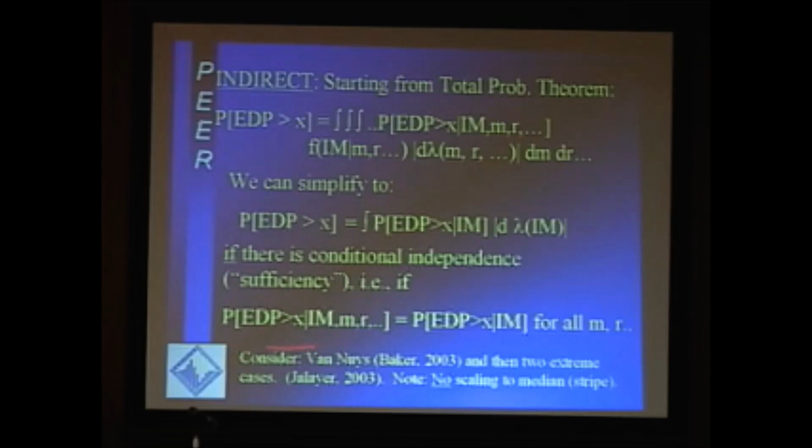So we change the problem to this indirect approach of studying conditional independence of predictions of drift. Once we've conditioned on intensity, we study their conditional dependence on other properties such as magnitude. Here's a typical result. Here's that same Van Nuys Holiday Inn, older reinforced concrete frame. We've used a degrading strength model due to Jose Pincheira. It has a natural period of about 0.8 seconds roughly. We've used 60 records. Notice the records are not scaled. I think I even said that here. Yes. No scaling.

That's for those people who find scaling unattractive. So here we have the results of some 60 nonlinear analyses of this structure. It's a 7-story, 3-bay concrete frame. So these are the spectral accelerations of the records. These are the maximum story drifts observed, ranging from 1/10 to 1 to 2 or 3%. And here's a line fit on log paper.

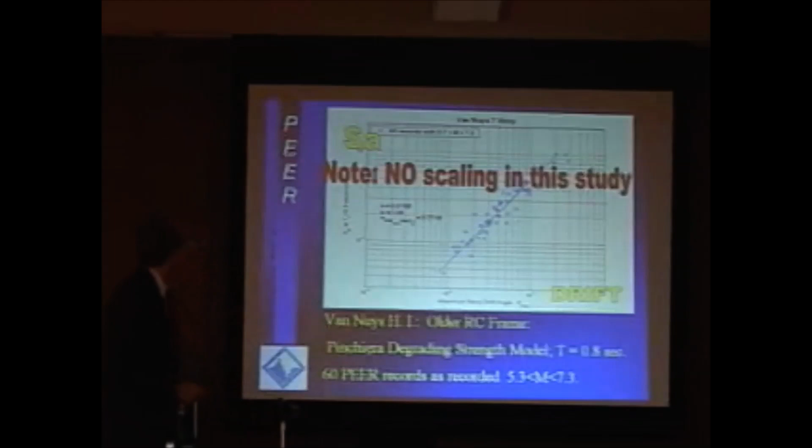So it gives us a form that says the median drift is a constant A times spectral acceleration to the power B. Notice the power B is approximately 1, so we could have obtained the same thing by just a straight line on arithmetic. So that's over a very broad range of records, 5.3 to 7.3. Just a repetition of that statement.

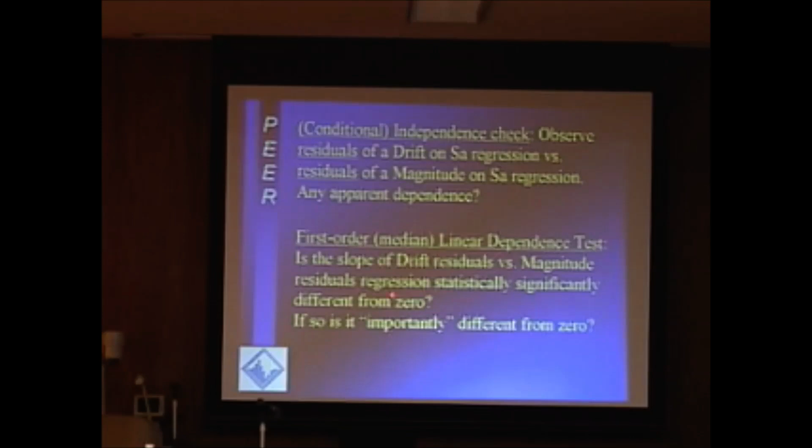So the question is, can we look at those kinds of results and argue that there is conditional independence of magnitude? We're going to use a simple, what we call first order test. We're just going to look at whether magnitude and distance affect median responses. We're going to do this by looking at whether the dependence on magnitude seems to be effectively 0. So what we do is we go in 2 steps.

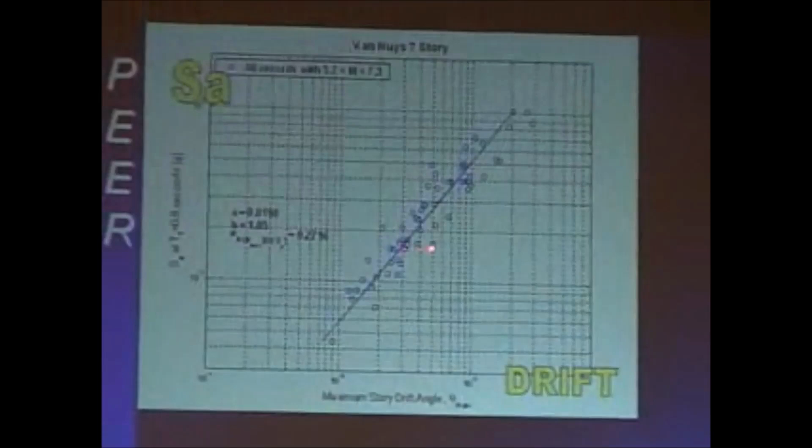Remember, we want to fix spectral acceleration. We want to condition on spectral acceleration. So we look at spectral acceleration. We take each data point, for example, that one, and we look at the residual. How far is the drift away from the predicted value, the straight line, for that particular record? There would be a positive residual. Here's a negative residual. Then we run a second regression of magnitude on spectral acceleration.

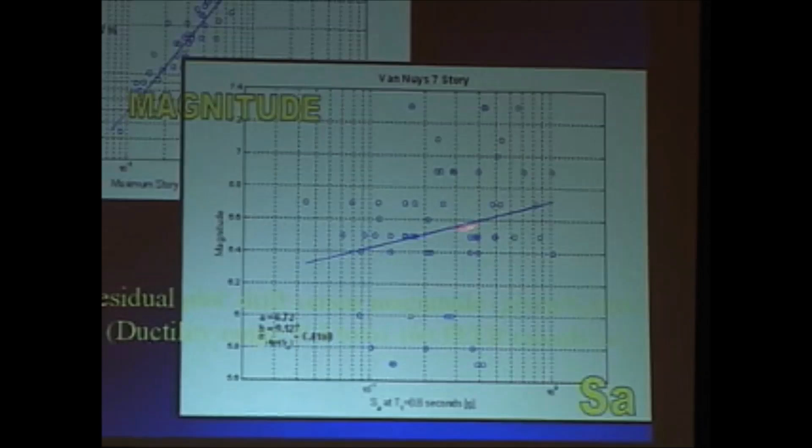So for each one of those data points, we find its spectral acceleration, and so we find the corresponding data point down here. The residual here says, for that spectral acceleration, here's the magnitude I expect, or the average magnitude for that spectral acceleration. Here's the residual, here's a negative residual, here's a positive residual.

So for that data point, for example, we look at this negative residual, this positive residual, we plot them data point by data point, and we get a plot of the residuals of drift as opposed to the residuals of magnitude. Why these residuals? Because we want to condition on spectral acceleration. We want to take spectral acceleration out of the problem and say, is there any apparent dependence of the drift, the displacement, on the magnitude of the earthquake that caused the record?

The fact that this line is very flat suggests there's very little dependence of displacement on magnitude once you know the spectral acceleration. We test that statistically by looking at the slope here, the slope B. I'm sorry, that's probably hard for you to see. The slope B of the line fit to the residual plot is 0.14. The standard error of estimating that is 0.08, I believe.

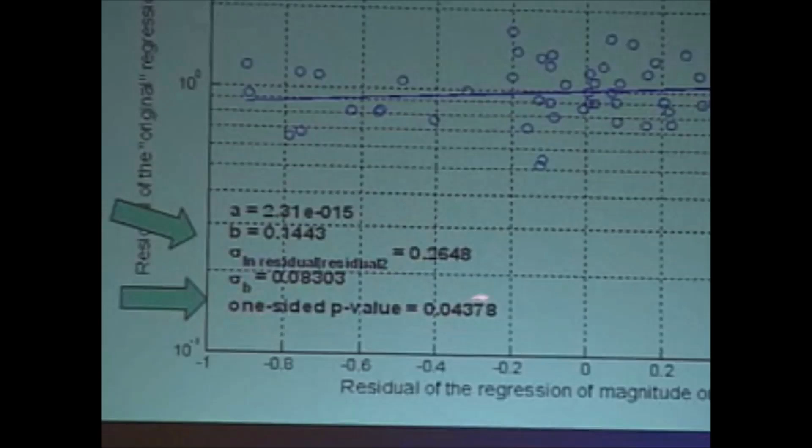We're given what a statistician calls a p-value of about 5%. That's a one-sided test. A two-sided test would be even larger. So if that number is fairly large, it says this is really almost a statistically insignificant trend. Large means 0.05, 0.1 or more. But you can see the trend is very weak. Even if you believe the trend is there, even if you believe that that is the real line that you would get if you had a sample size not of 60 but of 6,000, the dependence is quite weak.

This B is on a log-log plot or a log magnitude plot, so it says the displacement changes like e to the power, magnitude to the power 0.14. So a 0.5 change, half a unit error, let's say, in magnitude, means perhaps an e to the 0.07, or perhaps a 7% change in drift. So big changes in magnitude away from the important value, if you miss in estimating the magnitudes, do not mean large changes, even if that line is real and not just a statistical aberration.

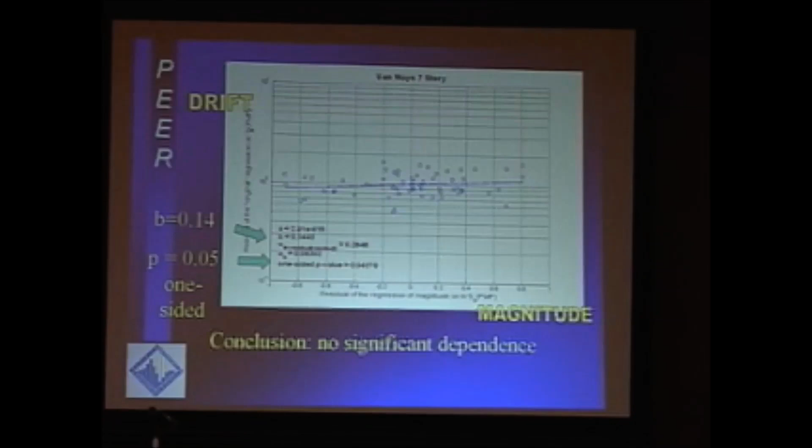So the conclusion for this particular structure is, again, there's no significant dependence of drift on magnitude once conditioned on spectral acceleration. That tells me when selecting records, I need not be very careful about selecting records to have correct magnitudes, correct meaning consistent with the site threat. Why am I only focusing on magnitude? Well, of all of the variables we've looked at, magnitude, distance, faulting style, magnitude is the one that may be a challenge.